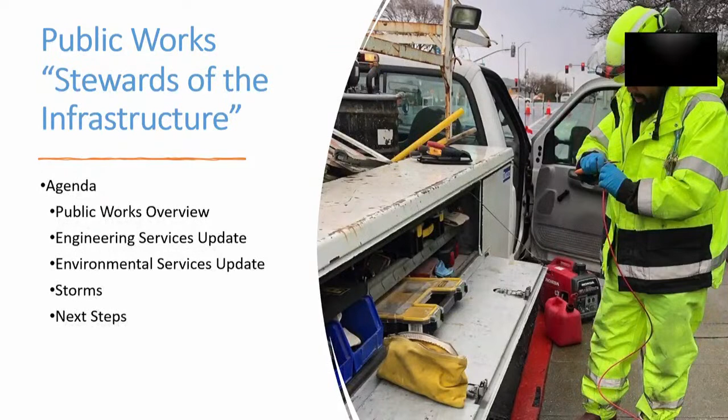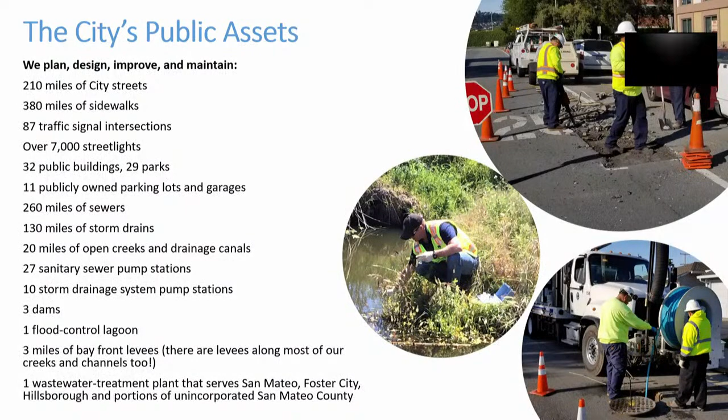On the agenda is the overview update from our two separate large groups, which consist of a number of divisions. We would like to give you an update on how the year ended and started in terms of wet weather, and then the next steps for the department. As you all know, we are the stewards of the infrastructure: many miles of streets, sewers, everything that's underground, everything that is above ground, as well as dams, a large lagoon, our levee system, and our 24/7 wastewater treatment plant.

Our budget: even though the 2022-23 capital improvement budget is larger than typical at 68 million, a large component of that is our Clean Water Program. Our operating budget is around $38 million a year.

We are now 150 of us, so we operate quite a few different divisions. As I shared, we have 2 deputies, and even though the department is not necessarily split in half, each deputy is responsible for 4 different divisions. We also have a business services division as well as our executive assistant team, who are always challenged to make sure these meetings run well. We're very appreciative of them, even though sometimes we run into issues.

I will give you an overview of each of the divisions, as well as what we do and what we have accomplished over the last year.

One of our largest divisions is the Capital Improvement Program. This is a group of engineers - we have an engineering manager, 3 senior engineers, and associate and assistant engineers. They are responsible for planning, designing, and building all the improvements and new assets of our infrastructure. Our typical CIP budget, excluding the clean water program, is around 15 million, and we have 14 full-time employees.

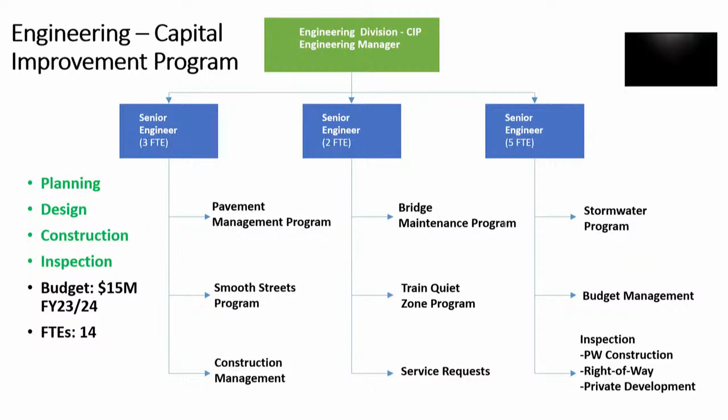I'll highlight a few of the more significant efforts. Our pavement management program is our largest asset, over 200 miles. We have different types of rehabilitation: we seal the cracks, we slurry seal, then we grind and pave, and when the streets have failed, we have to reconstruct them.

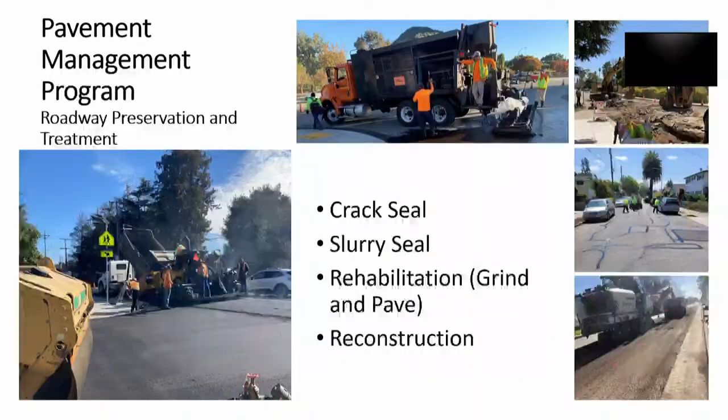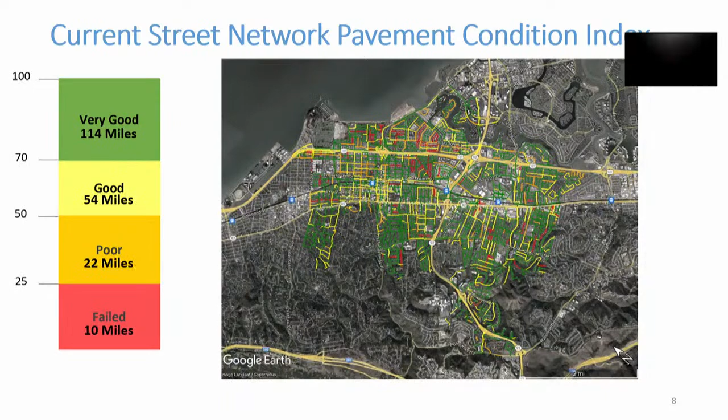This is how our current network looks. We track the condition of our streets using a pavement condition index, or PCI. If that PCI is over 70, we're in great shape, very good. If it's over 50, we are good. If it's under 50, we see a poor condition, and below 25 is failed.

We currently have the Smooth Streets program, and we're in design for the last phase, the last 5 miles. It's actually the most challenging phase because we're dealing with areas of very poor soil, so the reconstruction is more challenging and we're using different methods.

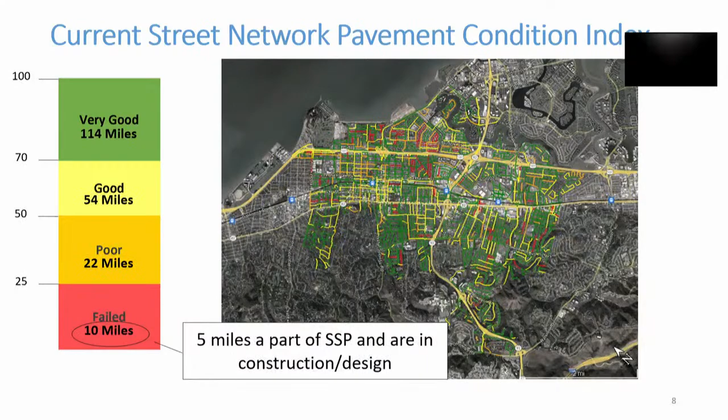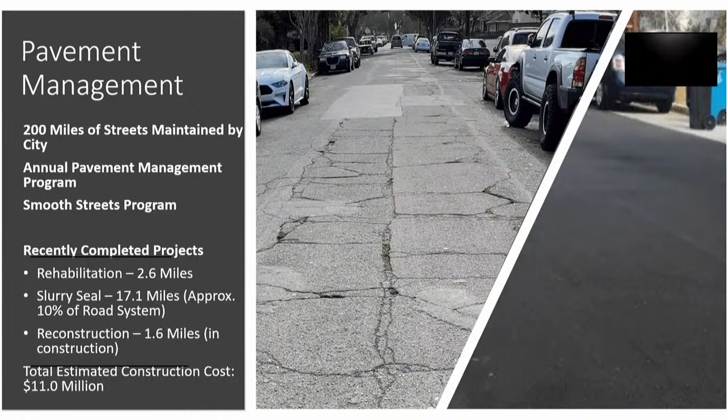As I shared, we have 200 miles. We recently completed rehabilitation of 2.6 miles. We are catching up on our slurry seal - we actually did 17 miles, that's 10% of the roadway system. And we reconstructed 1.6 miles, for a total of $11 million.

Moving on to train horn noise, a huge issue impacting quality of life here, especially for our transit-oriented development areas. You can hear the horns even if you're not within the half-mile radius. Our council members, over the past several years, have even flown to Washington, D.C. to learn more about how we can designate our city as a quiet zone.

So we've been working on this steadily. The issue is that in San Mateo County we have the most at-grade crossings. The trains have to turn on their horns, and there's a safety issue associated with at-grade crossings. So we've been working on safety improvements as well as separating some of our crossings.

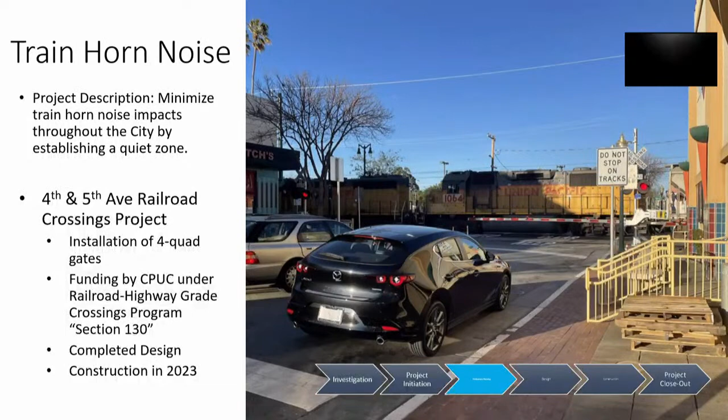Last year we completed 25th Avenue, and created 2 brand-new underground crossings at 28th and 31st. As a follow-up, we're improving 4th and 5th, installing more gates - quadrant gates - to improve safety features at these crossings. We completed the design last year, and at the beginning of this year put that project out to bid. The plan is to complete it this year.

Caltrain has their improvements in their right-of-way. The goal is for both efforts, theirs and ours, to be completed this year.

We are currently evaluating the next project to qualify for a quiet zone, assessing the crossings at Villa Terra and East Bellevue. That assessment will include either closing one of them or doing more extensive safety improvements, so we're evaluating the options. The goal is, once 4th and 5th are completed and we know the next steps on one or both of these crossings, to complete the improvements and then put in the paperwork to qualify for that quiet zone the following year.

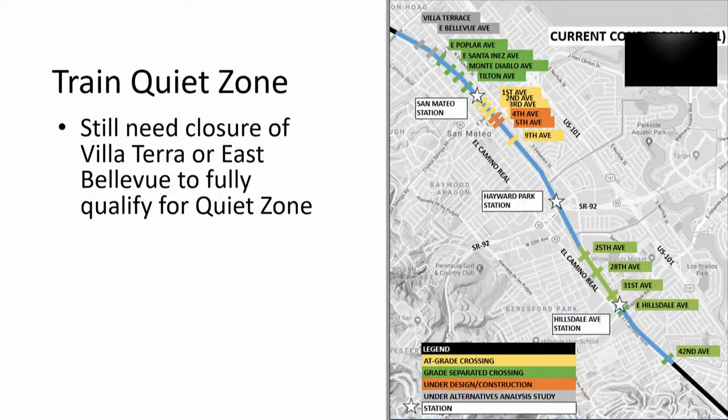Now on to bridges - these are projects that have kept us very busy. You're familiar with the Bermuda Bridge. We have quite a few bridges in the city, and this one needs to be replaced. It is seismically unfit, so we're in the process of designing its replacement.

This is the only way to get into the bridge that goes over the Fiesta Channel, and it's the only bridge residents have to get in and out of their neighborhood. We're currently wrapping up the design so we can begin construction the following year. We've been working with the community to figure out the outreach process and what needs to be done to provide people with access to their homes.

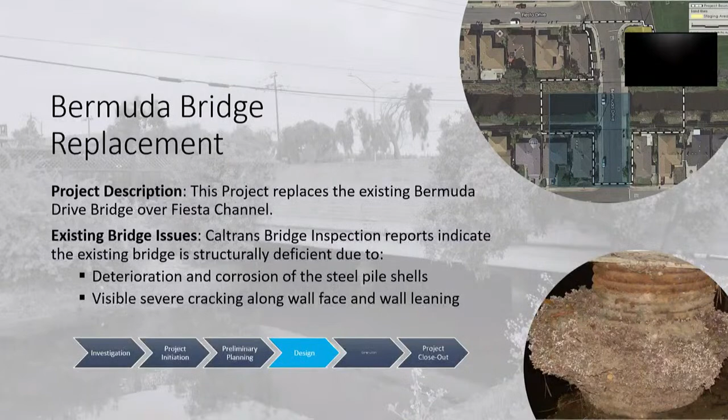This is a very significant project for us, the North Shoreview Flood Improvement Project. There's a significant area in the city that is in the flood zone, and those flood zones keep getting extended. So we've been focusing on improvements to 2 of our existing stormwater pump stations, and also increasing the height of 2 of the levee segments.

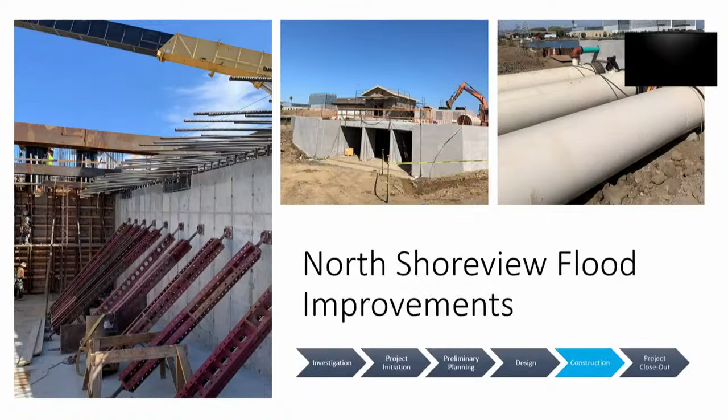We're making very good progress and are almost done with this project. The next step will be for us to file that paperwork to FEMA so we can remove the 1,600 homes out of the flood zone. We anticipate physically completing this project in the next 2 months. Then it will be up to FEMA, and that review process will take quite a few months to successfully remove properties from the flood zone.

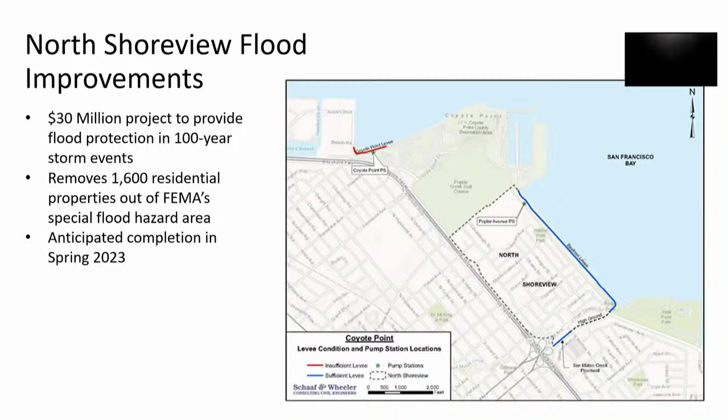I think in November we presented on Green Fleet. As we updated you, we are transitioning our fleet based on market availability. We're decommissioning the compressed natural gas facility at the treatment plant, and we've started having meetings with Peninsula Clean Energy to look at the programs they have to help us develop a transition plan. We've been very busy - we placed an order for an electric truck, and every time we purchase a vehicle, we assess whether there is an electric version on the market.

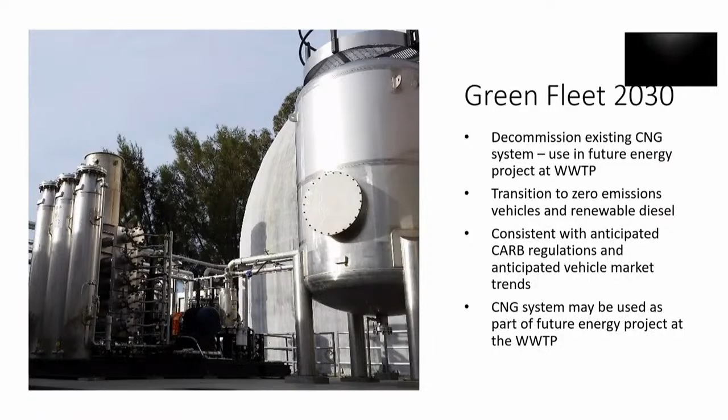The other effort we are wrapping up is a 15-year sidewalk repair program. As you may know, sidewalks, even though they're in the public right-of-way, per state law, are the responsibility of the property owner. I know that often creates a lot of concern and anxiety, but it is the state law. In Public Works, if there is a tripping hazard, we do a repair, intended to be temporary. We notify the homeowner that the hazard needs to be addressed permanently. However, 15 years ago, council did make the decision to create a 15-year program to work with certain communities and replace poor sidewalks.

We are down to the last funding available, and what we've done is use those funds more efficiently by saw cutting. Instead of replacing sidewalk segments, we go in and shave if we can structurally and remove that hazard, which has saved us a lot more money, and we can address many more deficiencies rather than replacing the whole segment.

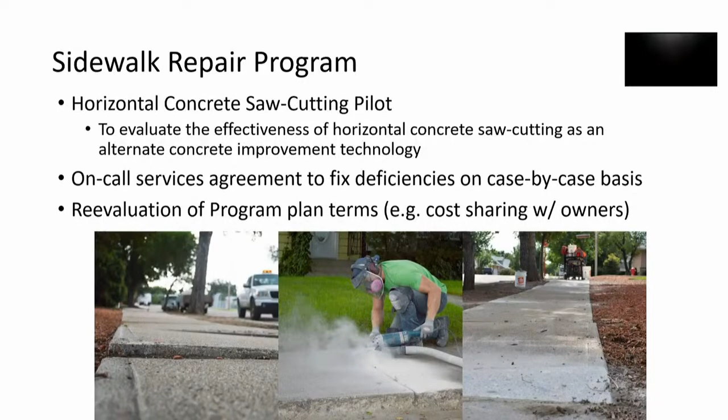As stewards of the infrastructure, you can imagine the number of calls we receive, whether it's street lights, traffic signals, sewer issues, storm issues, potholes, you name it. Anything in the public right-of-way, above and below ground, we are responsible for the maintenance and improvement of those assets. We receive around 3,600 emails a year to our Public Works email, about 200 to 300 calls a week, and everything gets logged into our asset management system that issues a work order to our crews. On the capital side, we handle those service requests through one of our engineers, who looks at sidewalk conditions, roadway deficiencies, and other improvements that require engineering rather than just maintenance. So we can be reached by phone, email, we have an online form, and we also have an app.

In terms of upcoming projects, we have our Smooth Streets program - we are on track on the design side and construction, and that program will be completed in 2026. Our pavement management program is in perpetuity; we slurry seal and grind and overlay every year. We're very excited to construct the improvements at 4th and 5th and achieve that quiet zone designation. And we've been patiently waiting for the landscape improvements at 82 and 92, where we are stuck with Caltrans on agreements there.

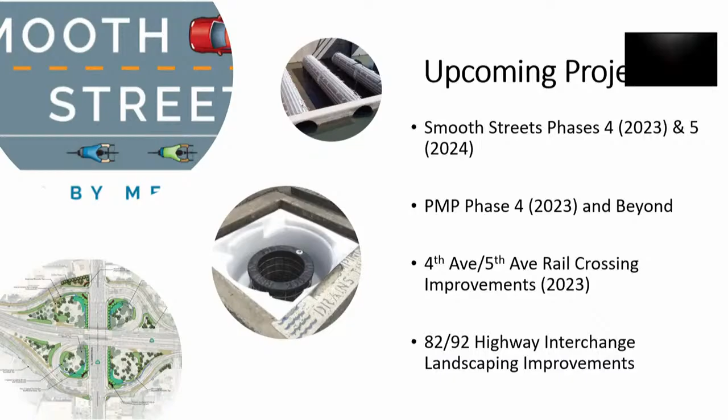That was CIP. All right, I will go faster because Matt is waiting for me.

On the transportation side, we have an engineering manager responsible for private development, transportation, and all the permitting in our public right-of-way. We have a senior engineer who oversees traffic engineering and operations, our neighborhood traffic calming program, and some CIP, such as our high voltage streetlight program. On the private development side, we have a senior engineer who manages all the permitting, encroachment permits, small cells, and private development reviews. We also have a senior transportation planner who works with engineering and planning to look at transportation policy, parking operations, and how we convert our streets into multimodal rather than vehicle-centric.

So our private development group has not stopped in terms of planning applications. We've been breaking records. Just this last year, they reviewed 162 applications, over 1,000 permits, over 1,200 encroachment permits, and small cell applications for wireless communications.

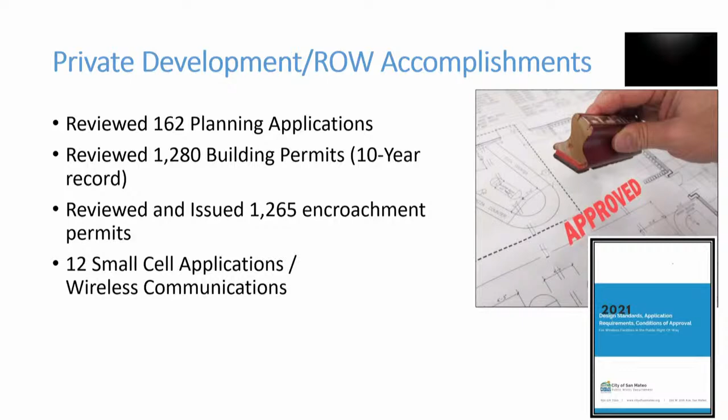On the transportation side, I'll spend a little more time on this group because it's a small group and it's a big city. We have 200 miles of roads used in many different ways. Our role in transportation engineering is to look at the planning piece in terms of how we're using our streets now, but also how we should use them in the future. What is the functional design? How can we improve operations? Then plan for improvements to provide safety and make our streets more sustainable.

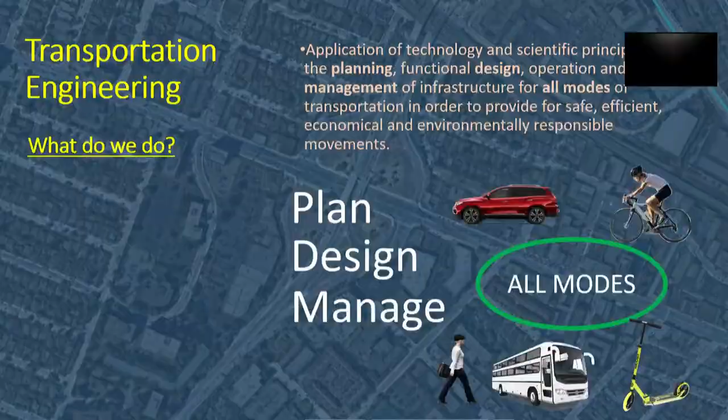We plan, design, and manage for all modes. Our traffic engineering group - one thing you'll hear from us is that even though as a department there are 150 of us, there are divisions that do a lot with just a few staff. Our traffic engineering group is a strong group of 4: a senior engineer, an associate engineer, an assistant, and an engineering tech. They manage everything from traffic signal simulations - they do some modeling, optimize, and modernize timing - so that we can relieve congestion.

They take a look at our collision data. Anytime there's a request for stop signs, they have to do an assessment to figure out if the vehicle volume warrants the installation of stop signs. They're continuously doing speed limit studies to assess how fast people are driving. They're responsible for our traffic calming program and action plans.

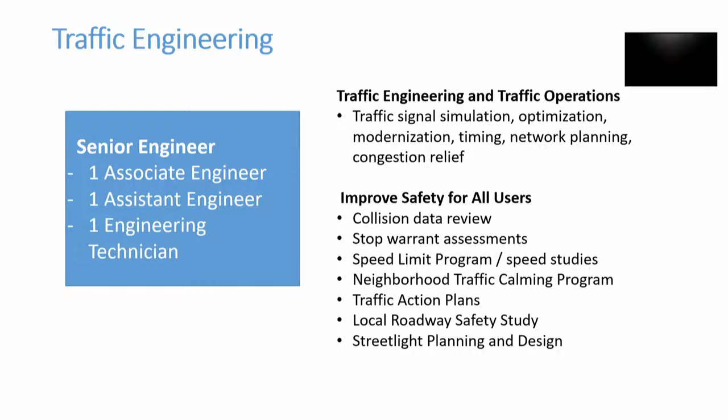We also have requirements to develop studies like our local roadway safety study, and develop standards for our street lights. They're responsible for capital improvement projects, such as grade separations. We've been very busy applying for grants. Even though we did not receive funding through RAISE, we submitted for 2 other grants, and we're waiting to see if we can get planning and design money for the downtown crossings.

They have also been very busy working on the 101 Peninsula Interchange project, doing the design and implementation for the school speed zones project, and then bicycle pedestrian improvements.

We are trying to do quite the job here to make sure that we coordinate internally. When we have a pavement project, we take a look at the bicycle network. We take a look at pedestrian improvements so that we are comprehensive and don't do things in a piecemeal fashion.

There's also a lot of coordination with our private development group in terms of reviewing development submissions. There are quite a few steps in a planning application, and one of the steps is their traffic impact analysis, so we review those and comment. We've been very busy working with community development on the general plan, specifically the circulation element.

We also have to make sure that the speed limits that are posted are enforceable. I don't know if we presented to council last month on where we are with our engineering surveys for all of the street segments. And then there's the master planning, developing a traffic signal master plan.

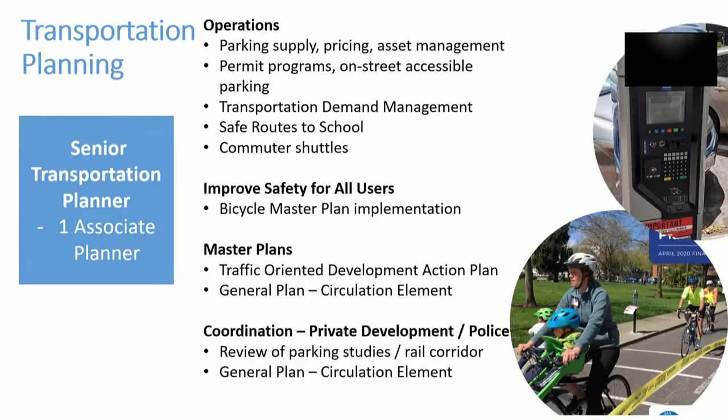And then ongoing coordination with private development. One of the questions we answer often is, how are our traffic action plans doing? I'll remind you all that our council has many, many priorities, and they go through this process every year, the Blue Sky session.

So one of their top priorities is, and I will read this: implement traffic programs and improvements to enhance safety for all users by utilizing public input and data, such as the input that led to the traffic action plans, to improve safety on neighborhood roadways and intersections. So this is our priority, to balance data with public input.

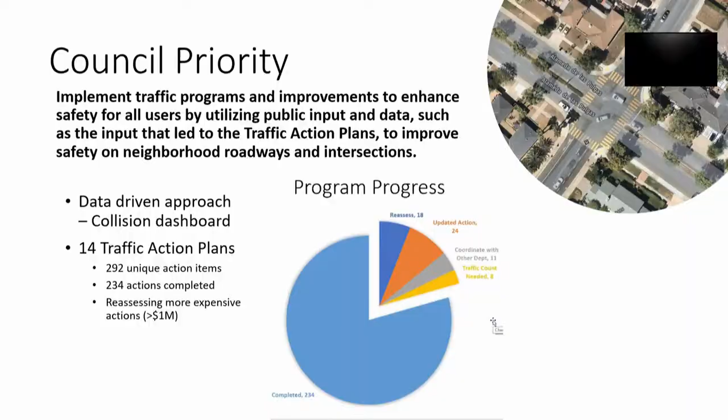We have 14 traffic action plans. Even though neighborhoods were able to give us their top 10, those top 10 actually involve quite a few different actions, and we have a total of 292. 234 have actually been completed. What is left are the efforts that are much more expensive and infrastructure heavy, projects that amount to over $1 million. So we are in the process of reassessing those actions by looking at what our data tells us.

About 3 years ago, we started this impressive effort with police, where we track collisions based on injury, whether pedestrians were involved, whether cyclists were involved. We actually have this data online, available as part of our effort to be as transparent as possible. You can see the heat maps - we have grouped collisions: yellow, number of collisions over the last 3 years, 20 to 70; red 15; blue 1 to 3.

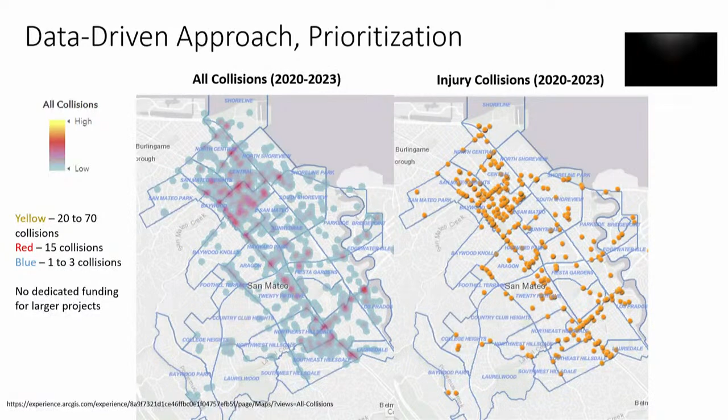What this information allows us to do is really figure out - because we have no dedicated funding for these, everything comes from the general fund - so we have to prioritize and figure out where that effort should go. We are trying to balance the last remaining actions from the TAPs with the data so we can assess where the collisions are happening. As you can see from the heat map, we have challenges in downtown along El Camino and Hillsdale.

So one of the TAPs projects is redesigning the signal at Alameda de las Pulgas and Hillsdale. We are currently in design, and the goal is to allocate funding so we can actually build those improvements in the next few years, with benefits to improve operations, pedestrian safety, and the lighting.

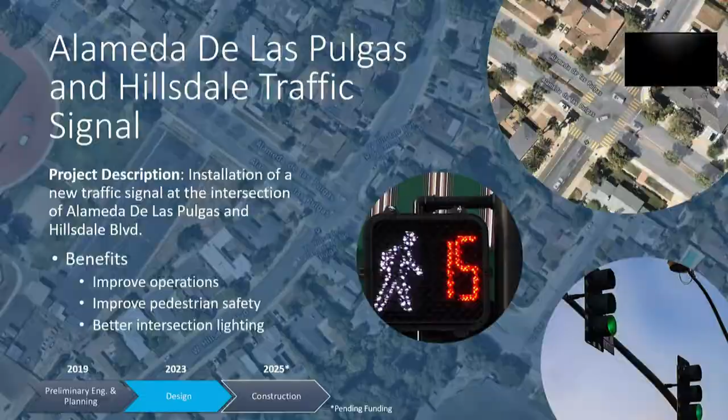The corridors, on the congestion relief side, are rather challenging because there are a lot of other agencies we need to coordinate with on the 19th Avenue corridor. So we completed the assessment, which will lead to the design to address vehicle congestion specifically during the peak hours for this area.

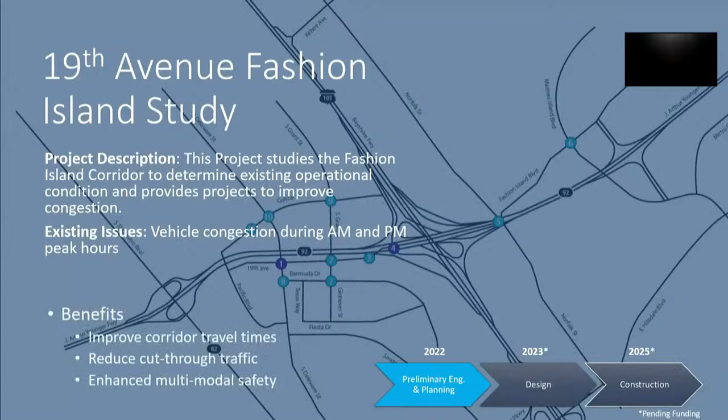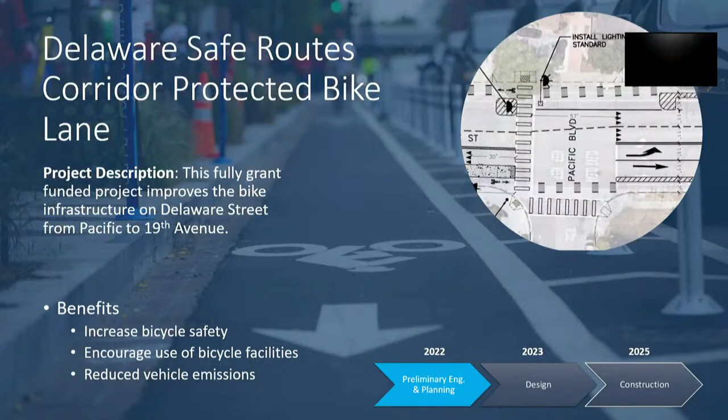On the bicycle front, this is another big project we're very happy to have funding for because we received a nice grant. This is the Safe Routes to School corridor, building a protected bike lane on Delaware from Pacific to 19th Avenue. We completed the preliminary engineering and planning last year, and this year we'll be working on the design, focusing on bicycle safety and reducing vehicle emissions.

You'll hear a lot more about our Complete Streets Plan at the next commission meeting - this is a big effort. The goal of it is to bring many of our plans together and to propose a vision for the public right-of-way that allows for multimodal use.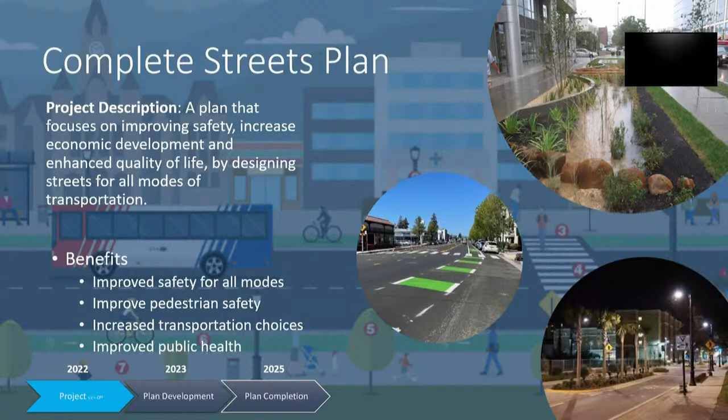One of the biggest challenges we have is that there's only so much right-of-way available. There's the circulation element in terms of moving vehicles through, a safety component associated with bicycling, parking demands, and also a desire to make our pedestrian realm friendlier and wider. So we will embark on an extensive and comprehensive public outreach process to assess from the community what vision our streets should have, depending on where we are - downtown, residential, or other commercial fronts - so we can focus on all the different benefits of having streets that are more complete, not just vehicle-centric. We await your comments on that process.

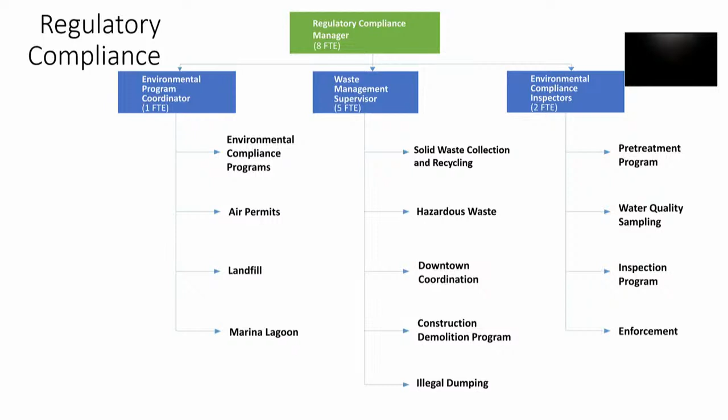All right, so on to regulatory compliance. This is also our busy group that deals with our environmental inspections, permitting - air, water, solid waste - and all the pretreatment, so that we don't get toxic things in our sewage.

So they are responsible for - and this is something that Matt Fabry did in his past life. He needs to forget about it.

He was incredibly helpful in his past role with CCAG, making sure we understood and implemented the Stormwater Municipal Regional Permit. He's moved on to sewage now, but on the stormwater front, we have to comply, making sure our stormwater system ensures what ends up in the bay through our storm system is of decent water quality.

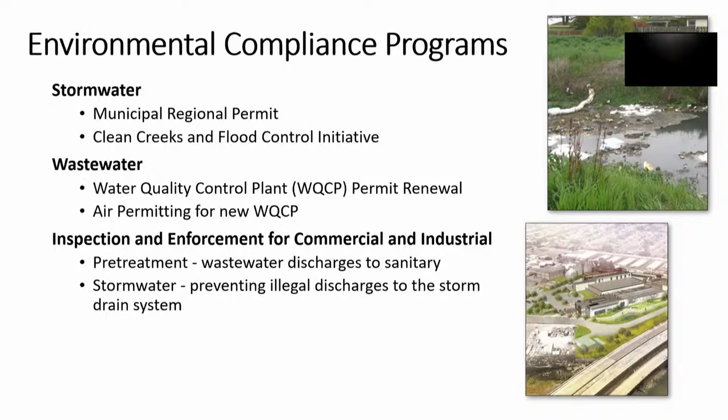We've also been busy finding funding for our stormwater system, and we kicked off a Clean Creeks and Flood Control Initiative last year. They assist us on permitting for wastewater and air district issues as well. We have an air district permit for the plant and all of our standby generators, and they inspect and enforce commercial and industrial activities.

We presented to council last year on solid waste rates, and we'll be going back to council this year for another annual increase. The big effort is to make sure our rates, as required by law, reflect the cost of service—meaning some accounts will see increases while others won't, since they're not balanced in terms of what it costs to provide services. We had a successful conversation with council last year and will return this year for the annual increase.

This group also manages composting. As you all know, we now have a requirement to compost, so they've been busy working with all property owners to make sure this program is well understood. They also handle a lot of activities throughout the year, such as the Bayfront cleanup, e-waste, and shredding.

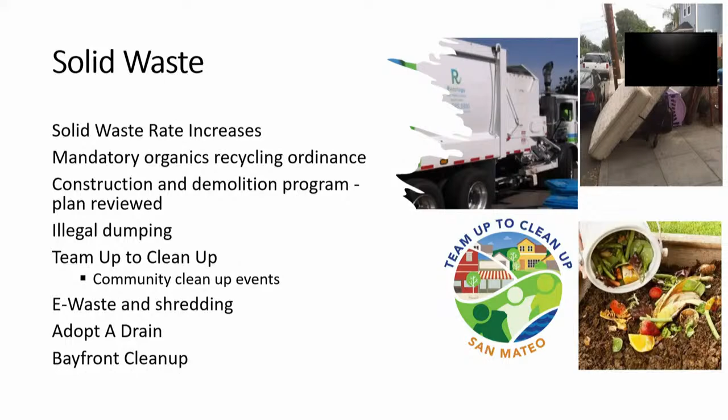We've presented to you a few times on our stormwater effort. The stormwater system doesn't have dedicated funding for this, unlike our sewer system. There are a lot of challenges managing the lagoon itself, which is our storage facility, including water quality challenges like goose control. On the stormwater front, we have significant unmet needs related to capacity, addressing constraints in the system, and of course the $80 million challenge for dredging the lagoon.

So we don't have a dedicated funding source. We did survey the community last year, and the support for a stormwater fee wasn't what we were looking for in terms of following through with a ballot initiative. But we'll be working with the community again on a tracker survey, with the hope of having an educational outreach effort to see if we can get the support needed for dedicated funding.

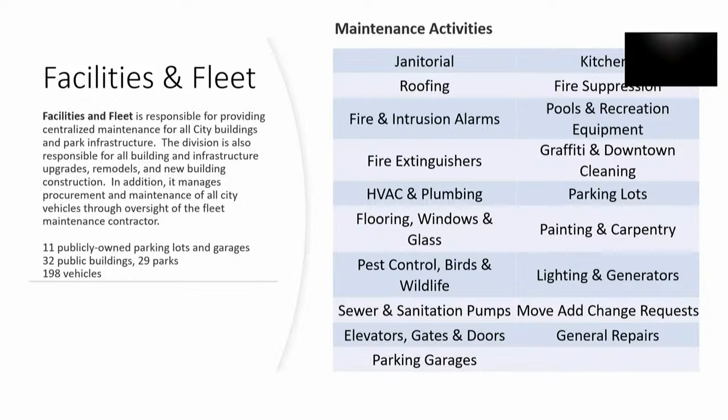We have 11 parking lots and garages, 32 public buildings. They're also responsible for park assets, such as fixing lights in parks when they don't work, and for replacing and maintaining our 198 vehicles.

In terms of projects, we have a big one right now: City Hall space planning. For us in Public Works, we're next door, and it's actually rather expensive, so we're looking to see if we can move back to City Hall. That would require quite a few changes to the building, so we're currently working with an architect to help us assess if we can make that move happen.

We've been very successful with the Marina Branch Library. We just received $1.5 million supported by Senator Feinstein, earmarked funding for that. We also received $500,000 from the state library, and 1.3 from the state surplus.

So we have a few million dollars to make sure that library is in good shape. Right now the floor and foundation are failing, so we'll be replacing the foundation and making other improvements so the community can have a safe building to use.

We've also been remodeling City Hall restrooms, doing work at the Yard and the King Center in Joinville, and we've just completed designs for 3 different restroom parks: Indian Springs, Fiesta Meadows, and Casanova. And with that, I'll pass it on to Matt Fabry.

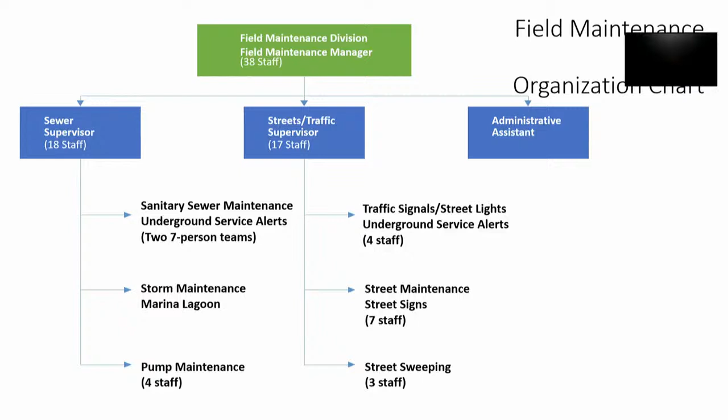We've got crews that deal with operating and maintaining our sanitary sewer system, including all the underground pipes. We also have sanitary sewer pump stations and storm pump stations, managed by a pump crew. We've got our Marina Lagoon with very large pumps—five of them at the Marina Lagoon pump station that help manage the lagoon. And we've got miles and miles of sewers, storm drains, trash racks, and filters that have to be maintained and kept clean to keep things flowing.

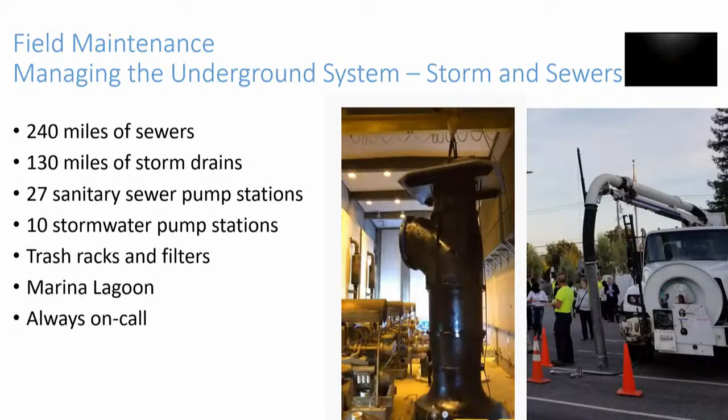These groups are out there every day doing preventive maintenance on these facilities, doing corrective maintenance when things go wrong, and we've got staff on call 24/7 if they need to get called out.

We've got a lot of stuff above ground as well on the streets and traffic side—these folks repair potholes and do smaller pavement improvement projects in terms of repaving. If it's smaller scale, our crews can do it; if it's larger, it goes to the CIP group as part of the programs Azalea talked about.

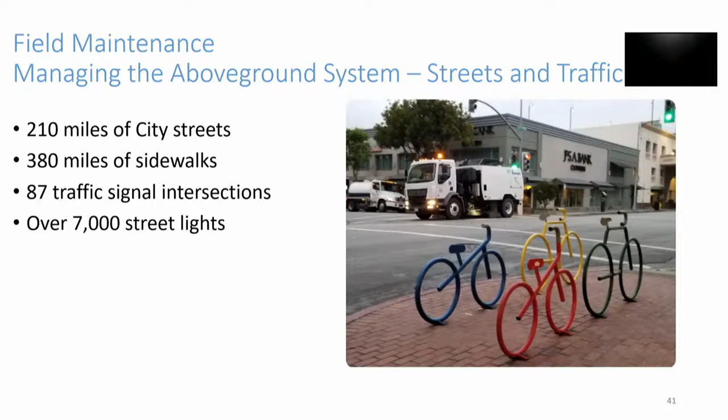We've got all the sidewalks, where we do some trip hazard repairs. We've got 87 signalized intersections, and our crews have to make sure all of those signals remain functional for obvious safety reasons. We've also got over 7,000 streetlights that are a frequent call-out to repair, and all of those have to be inspected and checked regularly to make sure everything's working.

This gives you a sense of some of the top 20 field maintenance tasks we track in our asset management and service request system. The biggest thing is cleaning main lines—that's our sewer crew. As Azalea said, we have dedicated sewer revenue for our sewer system, which allows us to have an active, ongoing preventive maintenance program.

It's not the same on the storm side of things, as Azalea said—that's a little different. We also do a lot of debris pickup. We have a lot of problems with people dumping, and eventually Public Works gets called if nobody ever picks it up, so our streets crew spends a lot of time on debris pickup.

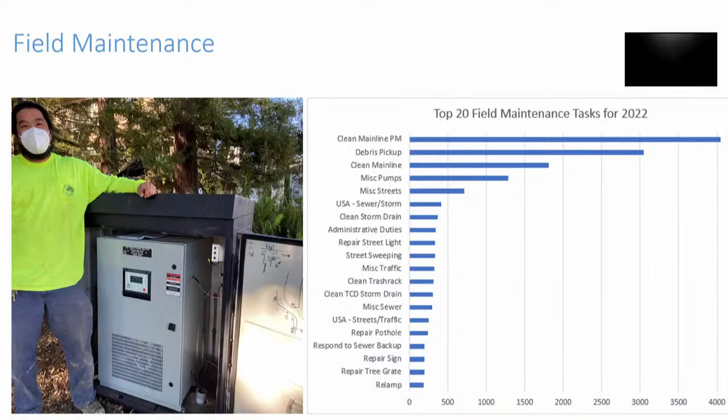This gives you a sense of all the things we do—thousands of different tasks every year, spread across all these different groups. That's field maintenance: a large group doing important, ongoing preventive and corrective maintenance work. They aren't doing some of the bigger projects.

We've got the wastewater treatment plant, where I have a similar number of staff—31 staff at the plant. We've got two main divisions, operations and maintenance, and a smaller laboratory division that does all the sampling and testing to make sure we're staying in compliance with our regulatory requirements. The maintenance side makes sure all our instrumentation, pumps, and valves continue to work, and runs the asset management program out at the plant.

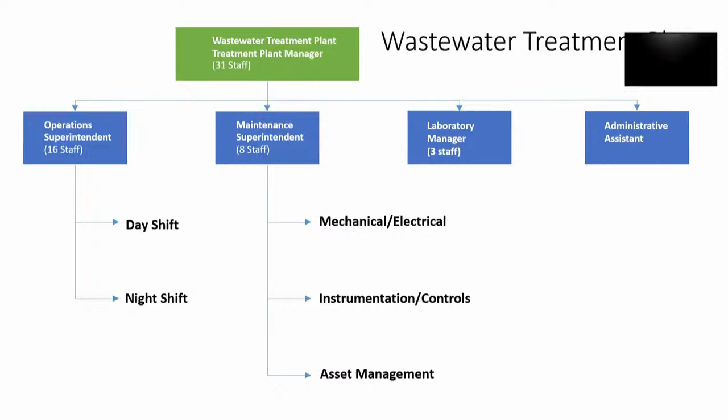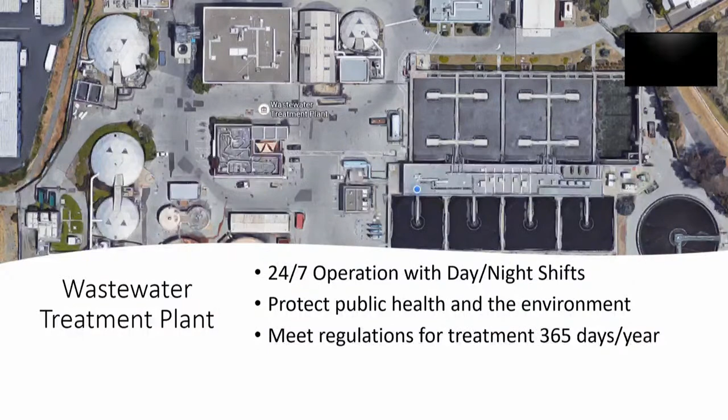As you can imagine, the treatment plant has thousands of different assets that have to be tracked in terms of the maintenance that needs to happen, and when things get done, we've got to track that. The operations side is really the folks operating the plant and doing all the stuff that treats our wastewater. This facility operates 24/7, 365 - it never shuts off, we've always got wastewater coming in. It's very important for protecting public health, and we're also protecting the bay with our discharge. We pump all of our treated wastewater out into the San Francisco Bay right underneath the San Mateo Bridge, so we have to make sure we're meeting all the regulatory standards to protect aquatic life in the bay. It's a big operation.

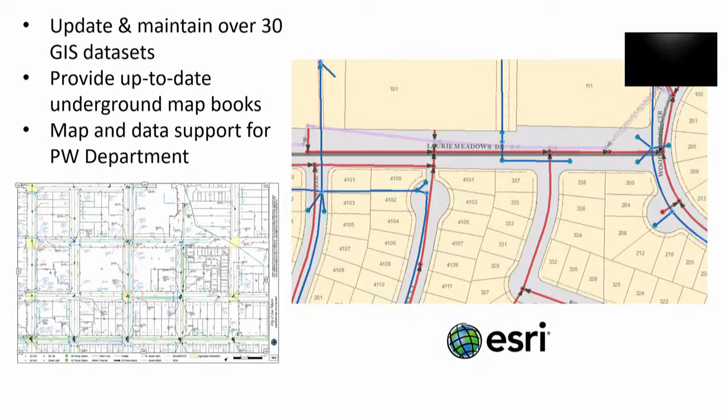I also manage a small division that, like Azalea said, is small but does a lot of great stuff - the data management division. They manage our asset management program for everything that isn't at the treatment plant, so all the preventive maintenance on our pump stations, sewer lines, streets and things like that gets managed through this group. They also manage our GIS mapping system and process all the underground service alerts that come in. When somebody wants to dig and do something underground, they call USA, we get notified, and we have to send our crews out to mark our utilities so they don't get damaged. They do all our mapping and data support for the Public Works Department.

They manage a lot of service requests - we get about 3,000 service requests a year from the public and other entities that we enter into our system and dispatch our crews to deal with. We have about 32,000 task activities recorded, and we do about 18,000 USA tickets a year. It's a big effort to review all of those - we don't have to actually go out to all of them, but it's a big effort to review and determine which ones we need to go out and mark our utilities for, to keep them safe.

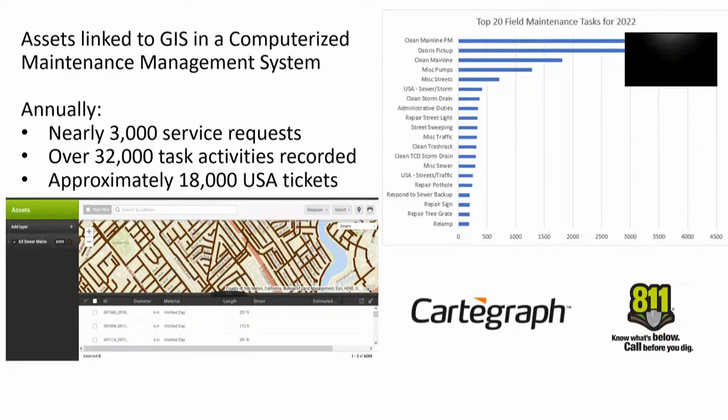The last group I manage is the Clean Water Program, a small group of city staff, but we also have very significant consultant support on this program. We've got an engineering manager and a couple of staff working on some projects - both collection system capital improvements and treatment plant capital improvements. We've got consultant support doing the bulk of the Clean Water Program efforts in terms of project management and construction management, all the environmental and permitting activities, and a lot of the public outreach.

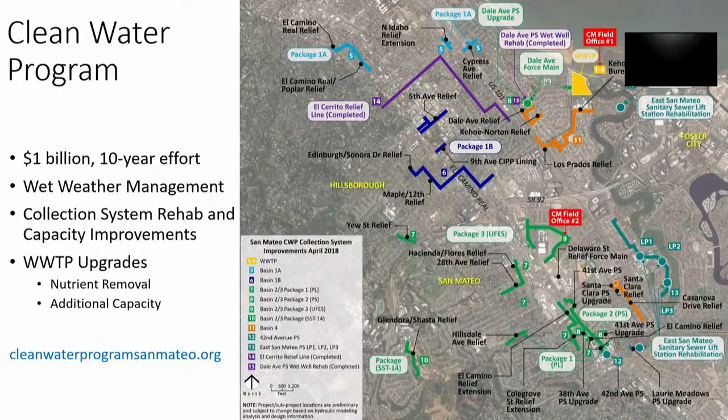You've probably seen this slide 100 times by now, but this is the Clean Water Program - a refresher that it's a nearly $1 billion, 10-year effort. A lot of the projects here have already been completed, which is great. We're focused on wet weather management, providing upgrades and capacity improvements to handle flow during wet weather events so we don't have sanitary sewer overflows. We're doing both collection system improvements and a brand new treatment plant, intended to provide additional capacity for wet weather flows but also enhanced nutrient removal. We're an early adopter of new technologies to help protect the bay in terms of nutrients.

We do annual rehabilitation of the sewer pipelines. We split our system into 5 different basins, and each year we evaluate and address defects in one of those basins, so the entire system gets addressed every 5 years. We basically go out and clean all the lines, then video those, look at what defects we find from the video investigation, determine which ones rise to the threshold of needing repair, and work with consultants to design the proper fixes - whether that's pipe lining or trenchless repair, or open cut repair - and then contract those out every year to get them fixed.

It's a big effort, but I think we're starting to see results from this. We had a period of 6 months - I think it was the first 6 months of 2022 - where we didn't have any sanitary sewer overflows, which is a big deal given how many sanitary sewer overflows we've had in the past.

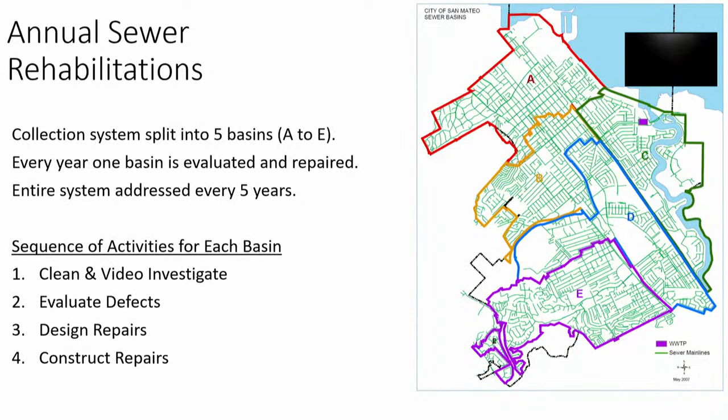So I think we're starting to see the benefits of all the investments we're doing in our system, as well as our proactive preventive maintenance activities. I'll show some images of the two big projects we're doing under the Clean Water Program. One is the Underground Flow Equalization System, or UFES—the big 5 million gallon underground tank at the event center.

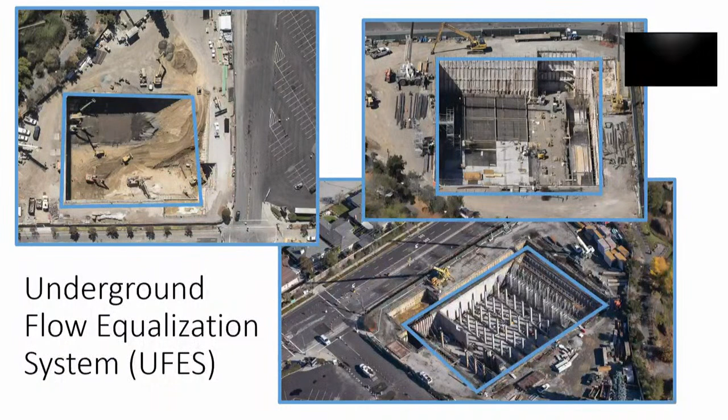These pictures show the progression over the year, starting from when we were still digging a big hole, to the upper right showing when they were pouring the floor for the facility, and the bottom right showing roughly where we are today, with all the walls poured and columns going in to support the roof. I was out there yesterday and they've got all the false work in place to start pouring the roof, so we should have a roof on there pretty soon.

These are some additional pictures showing on the left where we were at the start of the year and where we are at the end of the year. So we expect to be done.

This project also includes significant sewer work in Delaware, where we're putting in micro-tunneling—a new diversion sewer so we can send excess flows over to this facility. We expect to be done with all of the chaos in Delaware by the end of April, which will be a huge milestone. We've really impacted the public for a significant period of time with our work on Delaware and Saratoga. We expect to have the UFES facility up and functional in time for next rainy season starting in the fall, so that will be great to have in place for next year.

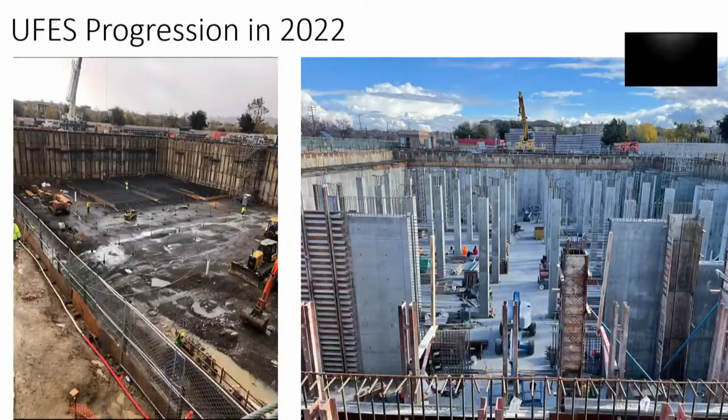Lastly, I'll cover the treatment plant upgrade and expansion. This is our biggest project, overall over $500 million, and we're about 60% of the way done at this point, which is great.

This project was contracted in three phases. We're done with phases 1 and 2, which were excavating and site preparation and then doing the foundation for the facility, so now we're very deep into building the facility. We've done about 95% of our 32,000 cubic yards of concrete—a huge amount of concrete that's been poured.

We're going to be shifting away from concrete by the end of this month, I think, and then moving heavily into the electrical, mechanical, and process instrumentation portion of the work. So that's where we're going to start seeing a lot of cool stuff happening out there.

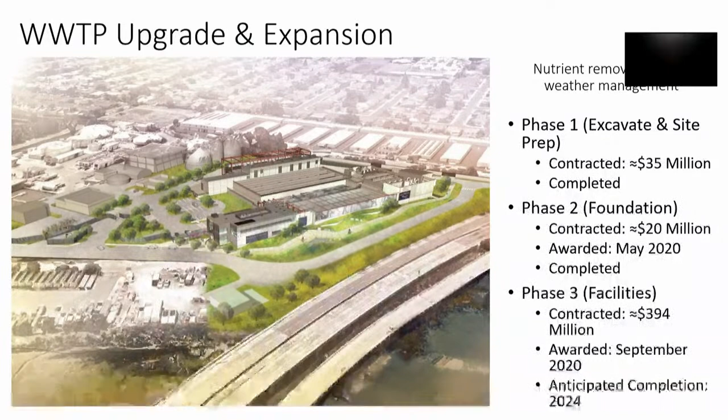This will be a series of pictures from the 4 cameras we have out there that are linked to our Clean Water Program website. I'll show where things were at the start and at the end of the year.

This is our administration building. You can see the structure of it at the beginning of the year. The building is fully enclosed on the outside now. You can't really see all the work that's happened on the inside, but there's been a significant amount of work—sheetrock up in our bathrooms and all kinds of stuff. You can also see the solar panels on the roof, so it will be a LEED facility, which we're looking forward to.

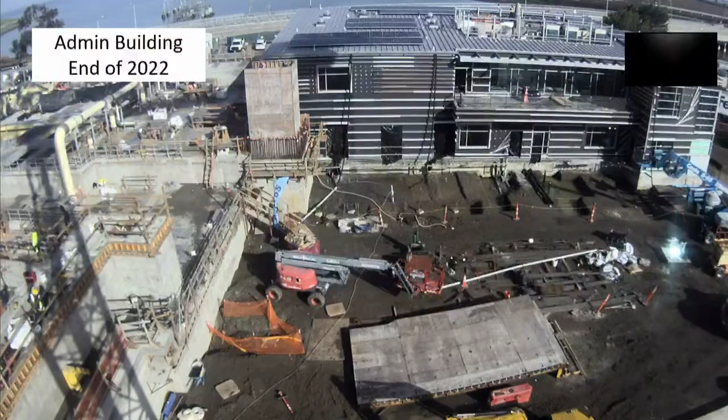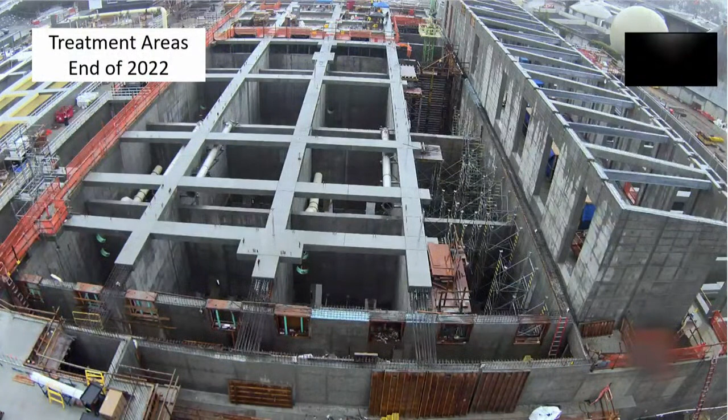These are the treatment areas at the start of the year, where they were pouring the basement or floors and working on the walls, and this is where things are now—we've got something that looks a lot more like a treatment plant. We've got our large equipment building for our membrane filtration system on the right side, and our biological nutrient removal treatment areas in the center of the photo.

So this is going to be a huge improvement over our existing treatment plant, where we don't have the traditional headworks in terms of screening and grit removal and things like that. So it's going to be a big improvement over what we're doing with our current plant.

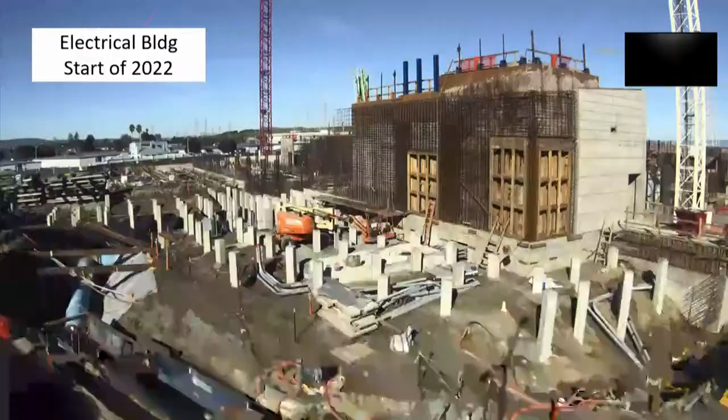And then this is looking at where our main electrical building is. That's the structure that's underway. But you can see at the beginning of the year, we still had just a whole lot of piles that had been put into the ground. I think we installed over 1,900 piles for the whole project.

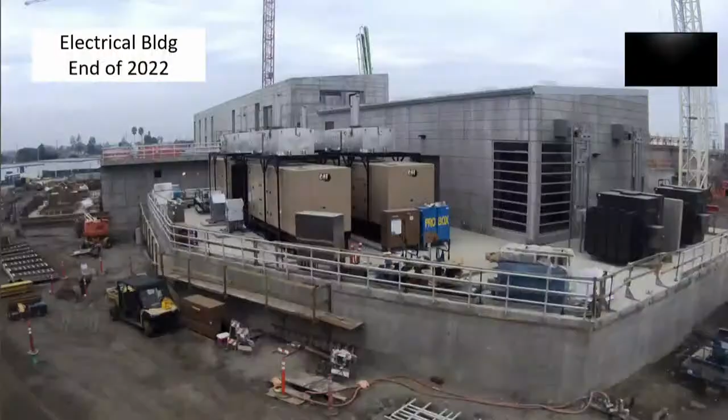And then at the end of the year, you can see here what it looks like. Those are our 4 very large emergency generators that will provide standby power if we lose power there. The electrical building, and then you can see again in the background the large equipment building for the membrane filtration. So, I think that is it, and I'll turn it back to Azalea.

Thank you, Matt. So we did want to take this opportunity to give you an update on how the year ended.

So as I mentioned earlier, the city, land-wise, is 12 square miles. We have 7 major watersheds, and 2/3 of the city actually drains into the Marina Lagoon. The Marina Lagoon is a storage facility. It is a controlled structure, which means it is dammed, and the only way to get water out of that is during wet weather events, is for that water to be pumped out.

So we start the wet weather preparation work actually in October, and we have quite a few preventive maintenance tasks. Even though we do routine preventive maintenance, we go into a much more busy mode in wet weather because we have to make sure everything is operational, especially the 10 stormwater pump stations that will have to be ready when the rain falls. And we also remove leaves and debris.

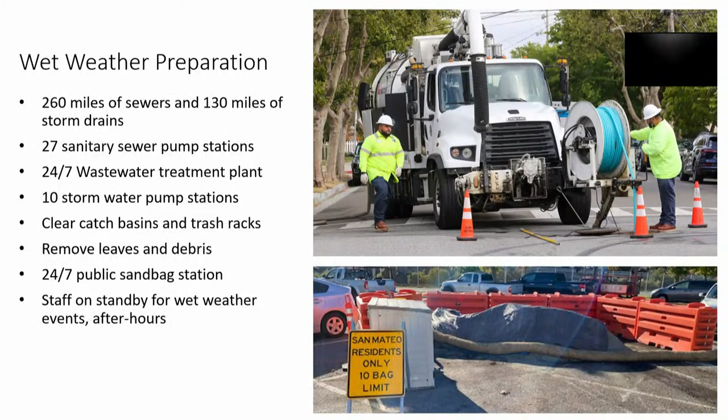We open up public sandbag stations, and then before an event, we actually ask staff to sign up for standby so that they can be called in if the event turns out to be larger than anticipated.

So on New Year's Eve, we were expecting 0.95 of an inch in San Mateo. We receive reports from the National Weather Service every day. I take a look at these, staff take a look at these. We also have a system where we have gauges throughout the city, and based on the rainfall forecast, we see what the projected rainfall is expected to be for the city.

So unfortunately, those forecasts for us were off. While we were expecting an event that was to bring 0.95 of an inch, we actually saw 4 to 5 inches. And a lot of water came down in the early morning hours, and by 8 a.m. we had flooding throughout the city.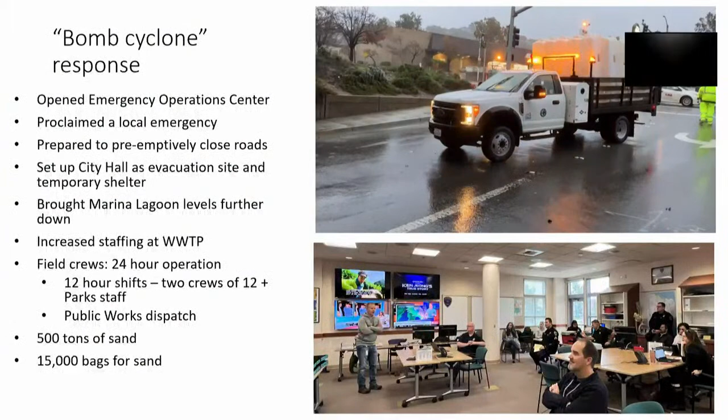So after New Year's, we were expecting a much larger, significant storm, and so the city opened up the Emergency Operations Center. Our city manager proclaimed a local emergency. We went into heavy planning mode, knowing the areas that might flood. We had staff actually drop off barriers in case the areas did flood, so that we could barricade them and block off traffic as soon as possible.

We set up City Hall as an evacuation site and temporary shelter. We brought down the levels in the Marina Lagoon even further.

We asked staff to come in for the treatment plant, and we did something that we had not done. So our crews work from 7 to 3:30, and we actually asked them to split their shifts. They worked 2 12-hour shifts so that we could cover the night.

And then we also set up a public works dispatch. So typically during the off hours, our calls go to our police dispatch, and they call the folks on standby. But on New Year's Eve, they were overwhelmed and received 1,300 calls. So we actually asked staff to answer the phones through the night, and they logged every call and communicated with the crews.

We actually also had our park staff help our crews. So we had 4 park staff work during the day and through the night to help our crews address quite a few fallen trees and areas that did flood.

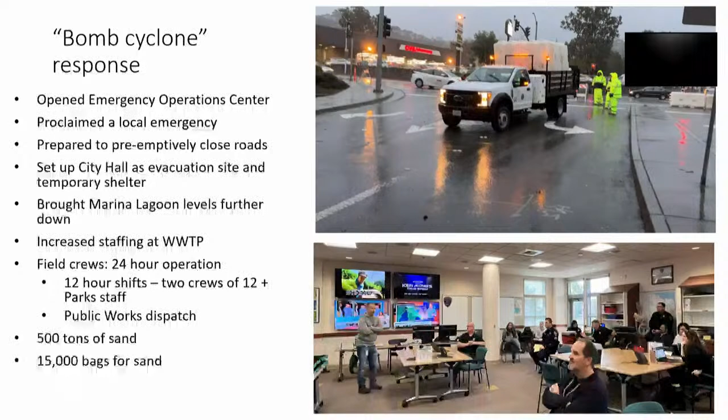We were also coordinating with the San Francisco Public Utilities Commission. San Mateo Creek is the watershed for Crystal Springs Reservoir, and over that period, the reservoir's water level increased by 10 feet, so there was a concern about it overtopping, water going over the spillway.

During that time, we were working with our hydraulic modelers to figure out, if water were to go over the spillway, what the downstream impacts would be. We identified areas that would need to be alerted and potentially evacuated. Luckily that didn't happen, but we kept the community on alert and worked with SFPUC to make sure they continued releasing into San Mateo Creek to bring the water level down.

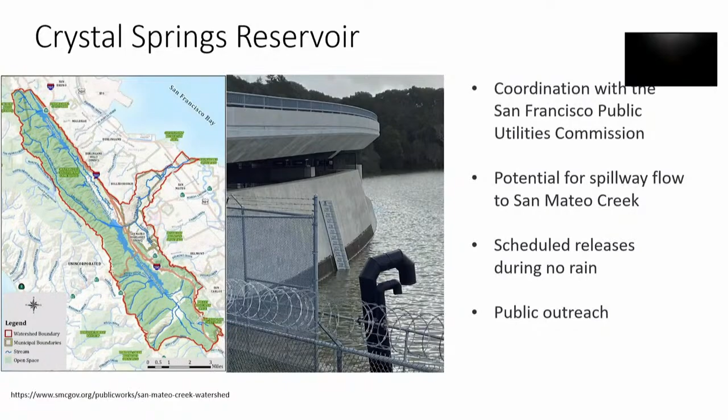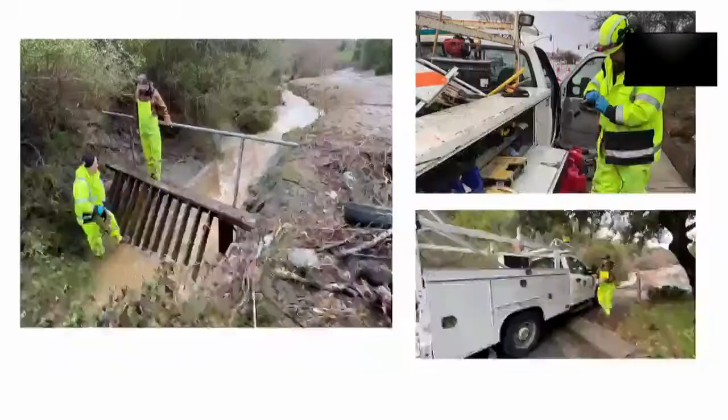We have to continuously make sure our trash racks keep flowing. What you see on the left is a video of our staff going in and removing things like tires, bricks, and concrete blocks to make sure these racks keep flowing and that trash is actually removed and doesn't flow downstream.

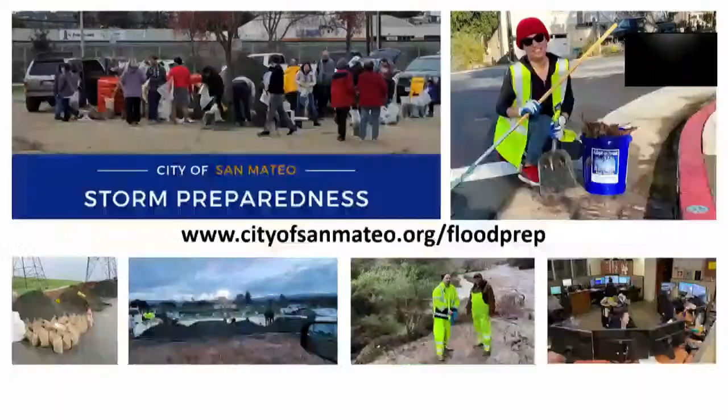These are pictures of San Mateo Creek, where we ended up going in and removing trees that had fallen in, and vegetation. We also kept our flood prep website up to date to let folks know, and we actually did receive a lot of volunteers who adopted drains, which was really wonderful to see.

We were also fortunate that the rain events on January 4th and the 9th were not as bad as had been predicted.

So what are the next steps for Public Works? This Saturday we have the Blue Sky session. We currently have over 40-something priorities for Public Works, and we'll see what our new council wants to see as part of that effort. It's an in-person event at the College of San Mateo, and we're expecting it to be a full day.

We've also been very busy on our budget planning. We actually begin this process in November, so we've been identifying, working with our teams to see where we are on completing designs, what's going to require money for construction, and then to see what monies are available for us to actually make that construction happen.

We have a lot of public engagement ahead of us, in that we will be coming back to you on complete streets, Bermuda Bridge, and the stormwater fee.

We've been very busy also working in our Community Development Block Grant area. This area includes the neighborhoods of North Central and North Shoreview. We actually just awarded a project to repair 4,800 sidewalk tripping hazards in this area, and this is one area of the city that has dedicated funding. We receive around $300,000 to $400,000 a year, which we've used to address pedestrian safety issues.

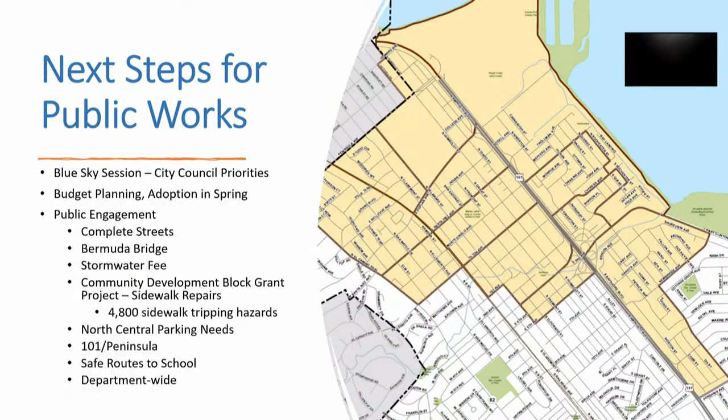On the stormwater front, we've been focusing on working with a consultant to reconstruct the storm event over New Year's Eve. We are in the process of scoping out pump and engine condition assessments. This is our largest pump station, and while we've been rehabilitating the actual pumps, these are diesel engines and they are old, so we are looking to see how these can be assessed.

We're continuing to coordinate with the SFPUC on how we can better manage the San Mateo Creek watershed. They are very open to working with us on a larger assessment so that they have the ability to actually increase the releases, so that we're not in a situation like we were over the last few weeks in terms of having that reservoir spill.

We are continuing the effort on the stormwater fee. This is a pretty significant initiative because our stormwater system has no funding. As part of the capital budget process, we will be requesting funding to reassess the volume that we have in the Marina Lagoon. It has been filling with sediment over many years, and this storm brought in a lot more sediment, so we have to do a bathymetric assessment to figure out how much storage capacity we actually have. We'll be requesting funding for that, as well as our hydraulic models for our creeks.

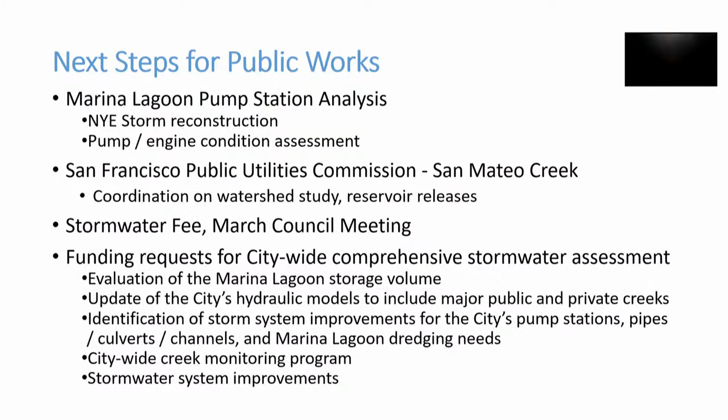So we really appreciate your time, and I know that you have a lot of questions, so we will stop talking.

Azalea, Matt, thank you very much, that was excellent. One question, Cookie, do we have any public comment, any slips or anything? No, I have none.